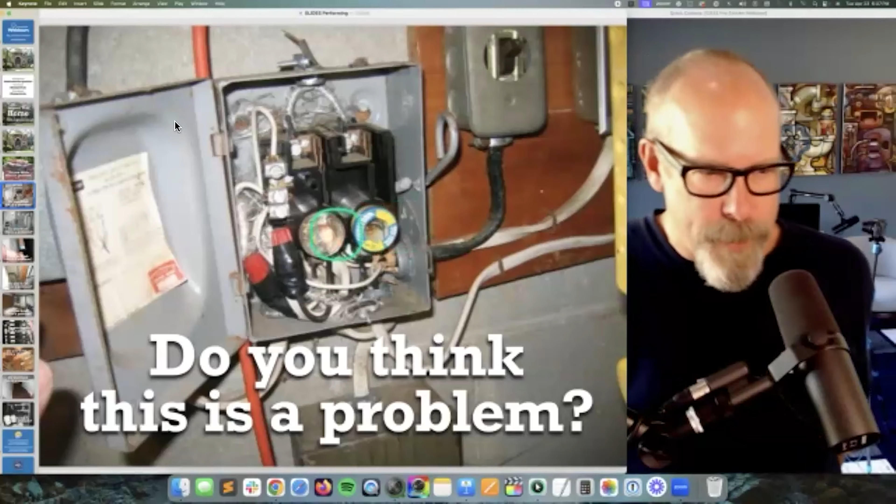Do you think this is a problem? This is an old fuse panel in this home. These connections are okay, but what is going on up here? There's some kind of damaged wire. I'm not sure about the connection. There's a lot of stuff going on in here. And the fuses, this one's overrated. You can't have a really big fuse or breaker on a small gauge wire.

Do you think this is a problem? They don't make these anymore. I like this picture because they just don't make this furnace anymore. This is a natural draft, gas-fired, forced air furnace. And we've got a couple problems here.

How about this? This is the end of a pipe. Looks like a drain pipe of some kind, maybe a discharge pipe, and it's dripping. It's copper, obviously. A dripping pipe doesn't necessarily mean a defect, but this one is. This is a defect, and I'll tell you why, because of the type of discharge pipe and what it's connected to. Here's another discharge pipe. This is discharging from a clothes washer into this pipe, and that's a defect. Can't have that.

Do you think this is a problem? This is all from this home. So we're going to inspect this home and go over these problems. There's a couple problems in there. We already went over the knob and tube wiring defect. And this is a problem at the stairs to the attic space on the 3rd floor. And this is a problem as well. So those are some of the problems that we're going to find during this home inspection.

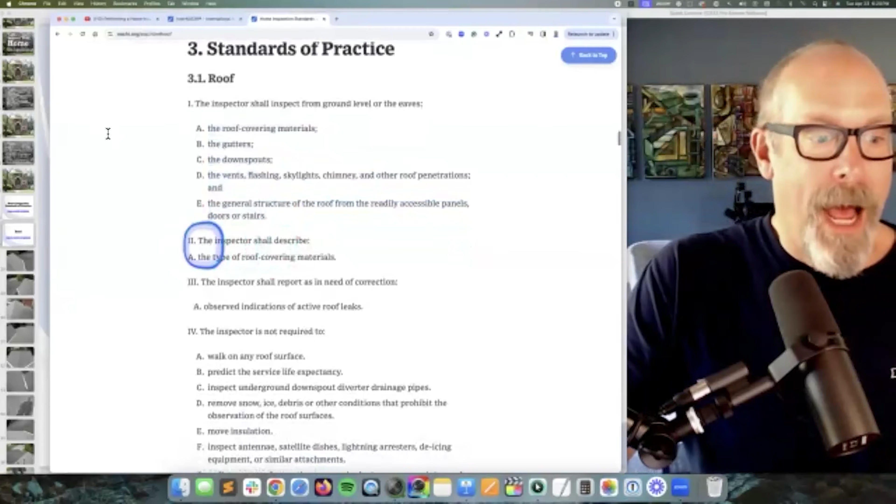What else am I supposed to do? I have to describe the type of roof covering materials. Okay, what else? I have to report as in need of correction, most importantly, active roof leaks - observed indications of active roof leaks.

So let's go back. Here's the roof. Remember, I get there early and start on the roof. I'm up on the roof. Remember, you're not required to walk upon the roof, but I do - it was part of my brand, the thing that distinguishes me from other home inspectors. Before I was a home inspector, I was a home builder, so getting up on the roof with a ladder was very comfortable for me. If you're not comfortable, fly a drone - you can get certified through InterNACHI.

So getting up on the roof was part of my brand, and that was part of my marketing as well. Your brand is the answer to the question: why should I hire you instead of any other inspector?

Because we're basically all doing the same thing. We're inspecting homes according to the same standards of practice. So what makes us different from all the rest? Well, it's the other stuff. It's marketing. And that's where InterNACHI can help you. It isn't just enough to learn how to inspect a roof like this.

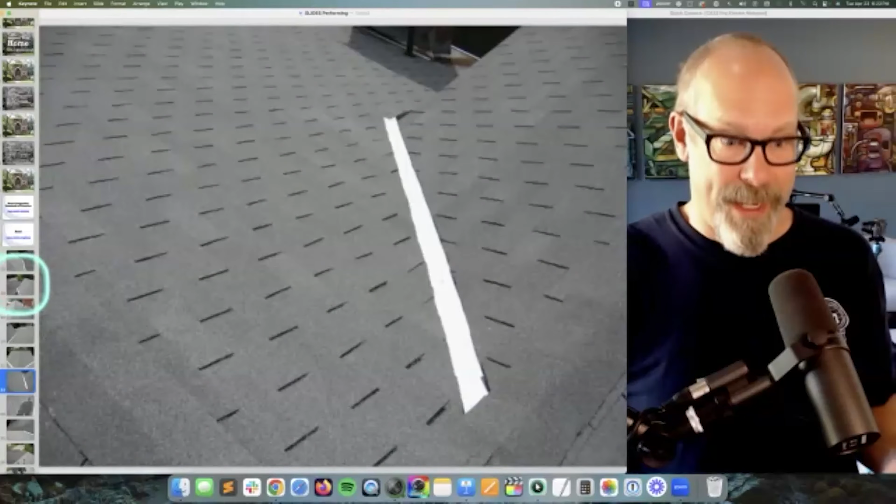To be successful in the home inspection service industry, and to run a successful home inspection company, you have to have business and marketing resources. And all of them through InterNACHI are free. You can join a group and have conversations about business, operations, marketing, services and strategies. InterNACHI does that through an accredited college, all for free for our members. That's why InterNACHI inspectors are so successful.

I love this shot. This is a marketing, this is a money shot, right? This describes with a thousand words. A picture's worth a thousand words. What I'm doing for my clients: I'm getting up there close and I'm touching the roof. Of course, I know the condition of the roof. I'm not guessing from the grass. I am right there, on the roof, touching it, getting up close and personal. If there's a problem on the roof, I'm going to find it.

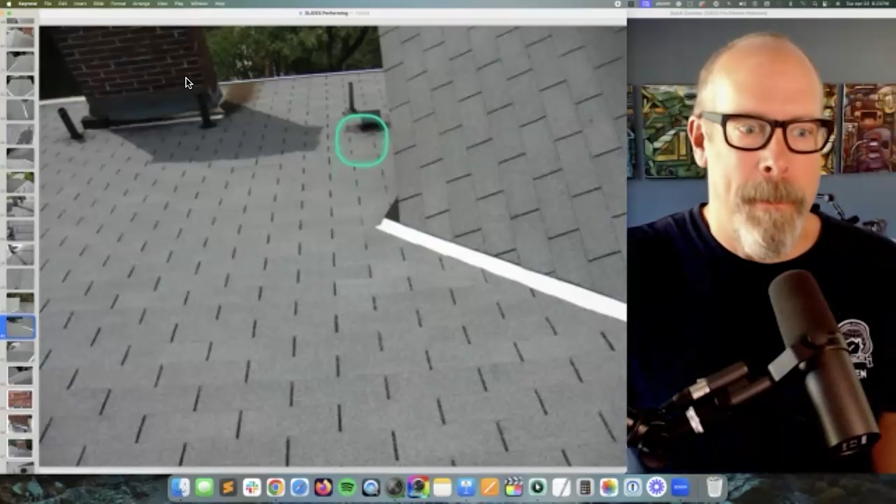And that was a distinguishing characteristic of our service. What I do is I take a ton of pictures. I probably took 40 pictures of the roof, every roof surface, looking for anything missing, cracked, or damaged, trying to guess the age if I don't know, looking at where a plane, a field, a flat surface meets another flat surface. This is flashing, like a valley flashing area, or where something penetrates, makes a hole through the roofing materials. If something comes through, first there's a hole, and then there's a pipe that comes through. Around that vent pipe, there's flashing.

And it shouldn't be heavy black tar silicone sealant. That's for driveways and temporary patching. On the roof, you want things like clean metal flashing, in between planes or around the thing that penetrated through the roof covering material. That's why you've got to get up close.

Oh, I also do videos too. The asphalt roof covering appears to be in functional condition. I don't see anything cracked, damaged, or missing. The shingles are lying flat. The granular surface looks good.

The valley flashings at the dormers appear to be functional. I'm not sure if this stack is being used. If it's being used, it needs major repair because of the masonry. The bricks are out of position.

Little video, it's a while back, low quality, right? Let's see, do I have another video here? The mortar joints are weathered and missing. And the chimney is very wide, so it needs a cricket or saddle flashing.

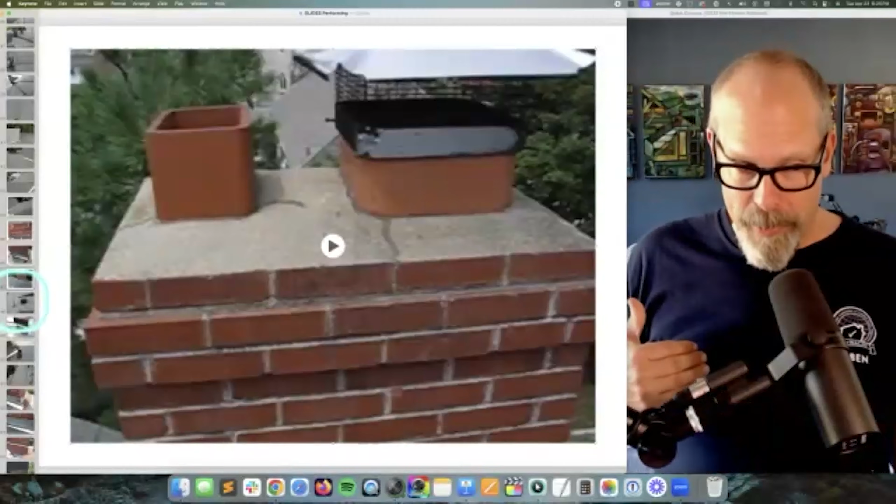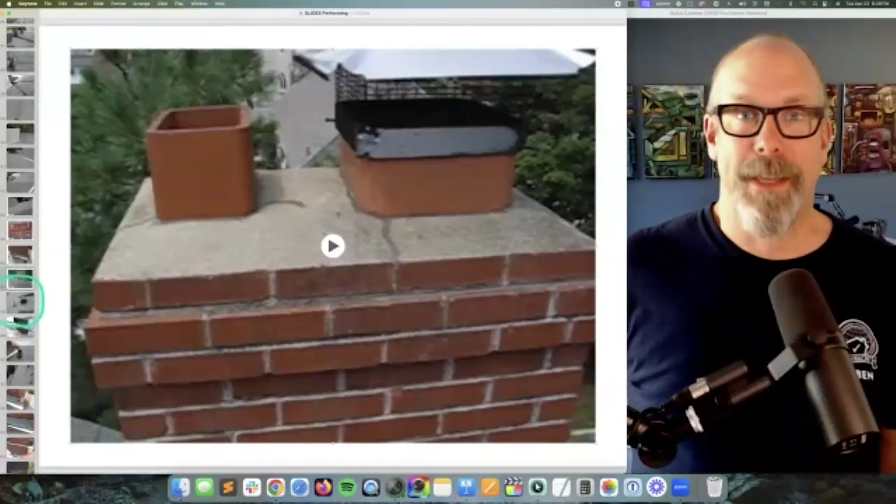So when I come down and meet my client for the first time in the driveway, at about 8 o'clock, they pull in, we shake hands, first impressions, fresh breath, business cards, and I tell them the condition of the home and the roof that I just inspected. I got down from my ladder, and I'll turn my device to them, my iPhone or iPad, tablet, and I'll play the videos.

Every time I play videos from a roof inspection for my clients who didn't have to go up on the roof with me, they're just shocked and pleasantly surprised. They're kind of like, we hired the right inspector, right?

So I don't know why you wouldn't take a lot of pictures and video. It's free, your device should be big enough to handle it, and your clients would love it. Remember, you're in the business of providing valuable information, not just doing a home inspection according to the standards of practice. You're in the business of providing value, and your clients have hired you to give them valuable information to make a smart decision. So in business, you want to overwhelm your clients with value.

Doing a video of the roof that they can't see themselves is incredibly valuable. We could just increase our fees like nuts, because every time you add value, you should get paid for it, right?

In business, if the perceived value is much greater than the cost, then it's a good decision. If the value of the information you're providing is overwhelming in comparison to the cost, if it's worth thousands of dollars, like that chimney stack that's messed up — that's a multi-thousand-dollar defect that maybe no one knows about, because from the ground, 40 feet away, it looks okay.

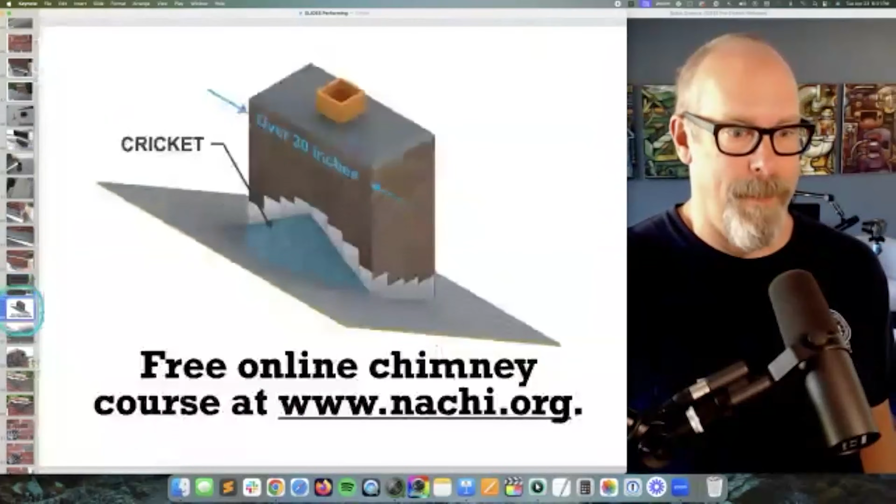That's what we got. How do you get to know all this stuff? You need to be trained. A great way to get trained is through InterNACHI, with our illustrations and pictures — we have pictures of everything.

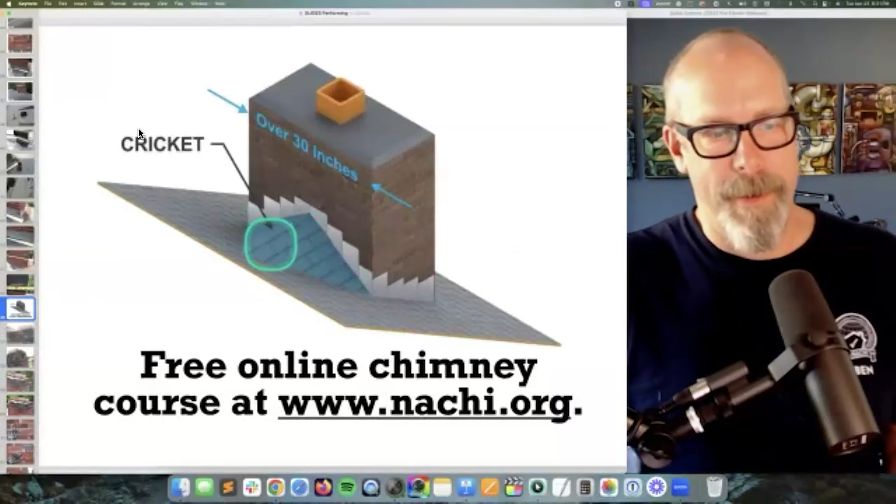This is a cricket — this is what's missing at that chimney stack, and it's because it's over 30 inches. You need something, because when you get a really big, wide chimney stack, water is going to puddle up on the uphill slope side. So you need to put in a little roof, essentially, to divert water around the very wide chimney stack.

So we have a chimney course through our online accredited college, and within the course on how to inspect fireplaces, stoves, and chimneys, there's a cricket section. If the chimney has a dimension parallel to the ridgeline greater than 30 inches and doesn't intersect the ridgeline, a chimney cricket must be provided. Flashing and counter flashing must be installed at the intersection of the cricket and the chimney. The height of the cricket depends on the slope of the roof — the lower the slope, the shorter the cricket height.

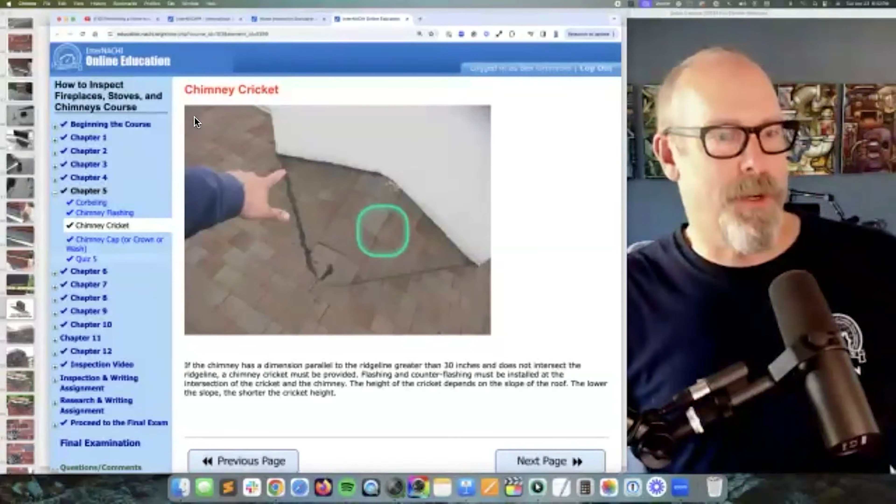That's really cool, and bam, there's a good picture. This brick here actually pushed back on the roof. It was just sitting at that angle, about to fall. If it falls, it's going to put a hole probably through the asphalt shingles.

This is a lot of fun for a home inspector, a lot of fun for me to inspect this stuff. When I come down off my ladder, I'm not frowning, I'm not getting my clients all flustered about a major problem. All I'm doing as a home inspector is telling the story, assuming that my client has found their dream home and they're going to move in no matter what I say.

So I'm going to describe the chimney condition, tell them the implications of not fixing what I observed as problems, and tell them who should fix it, like a chimney expert or mason. They're probably going to want to tear a lot down and build it back up. It's going to take a while to fix this. You can't fix it with black tar sealant. And even if the chimney is not used, they're going to abandon it, it still has to be fixed because it's falling apart, and pieces of heavy masonry are falling on the roof.

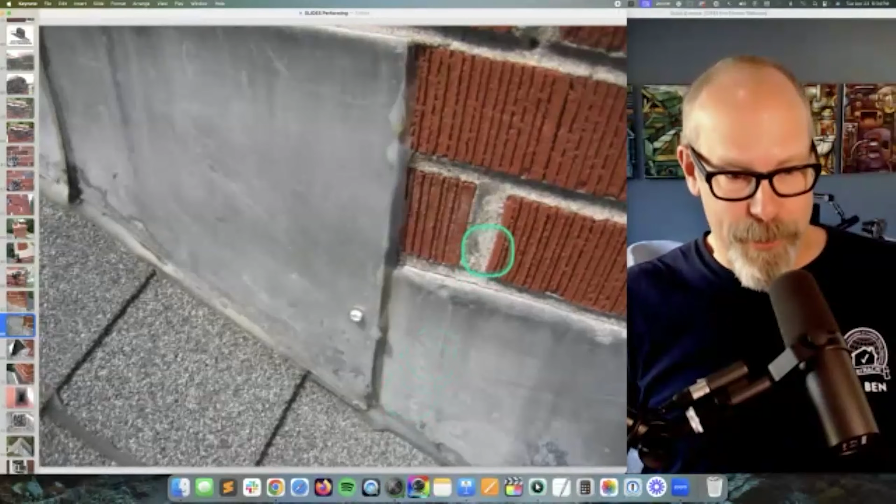The cap looks good. I like to see a little drip overhang, but that's okay. The flashing is tight - this is the proper way to install flashing. It's bent into the brick mortar joint, sealed just for added protection, but you could eliminate that if you wanted since it's masonry and metal intersecting with the asphalt shingle roof. This is really tight, this is really great. Kind of strange, though.

The counter flashing should have been on top of this one, so that's a bit odd. I think they just added more flashing to it or something. I'm not sure, but it looks great. I'm pretty happy with it.

I can take a shot with my camera down the flue. As a home inspector, I'm not required to inspect the interior flue liner, which is what this is. But if it's open and I've got my camera, I'm going to take a picture. If I observe indications of a defect in the interior flue liner with my eyes or camera, I'm going to tell my client.

Just because I'm following the standards of practice doesn't mean I have to treat it as a limitation. I'm permitted to exceed the standards of practice because they're a minimum - in fact, my clients probably expect me to exceed them. For example, the home inspection standards of practice doesn't even have the word flashlight in it. So if you use a flashlight as a home inspector, you're exceeding the standards of practice.

While I'm on the roof of the house, I take a look at the other structures on the property, and there's the garage - that garage roof looks in really good shape. There are other things I look at while coming down the ladder from the top roof, and I see we probably don't have central air conditioning - we have window units.

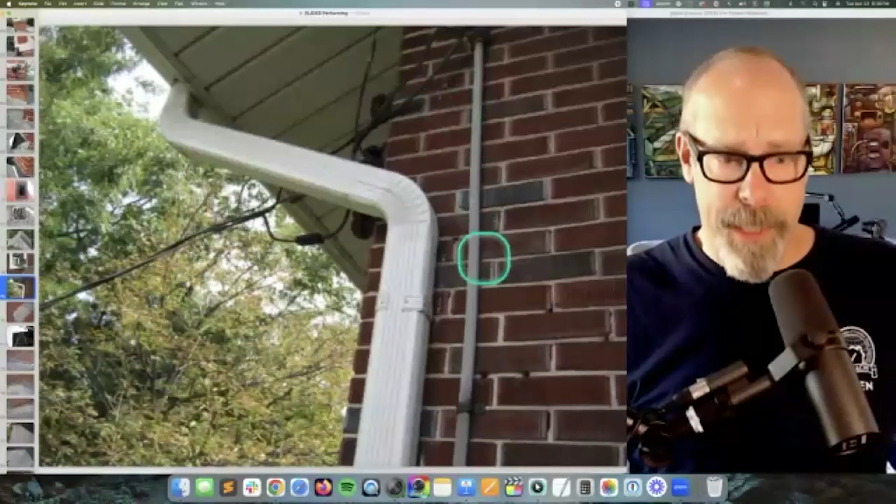There's the electrical line, overhead service electrical conductors, the drip loop, the connection point, service entrance cable. Coming down, there's the chimney stack in detail, there's my ladder, and there's another roof - a smaller roof on the side, I believe the front porch. I see flashing - anywhere the roof intersects anything else, I want to see metal flashing or good flashing made of an approved material.

So it looks good. I'm not required to inspect every window because that's impossible. I'm required to inspect a representative number of windows, especially from the outside. I can't be moving my ladder around the entire house looking at every window, but while I'm inside in the bedroom, I'll probably take a look at a representative number.

Here's a side roof, this is above the kitchen. I don't know that yet, but here's the two skylights. Wherever the roof plane or field surface intersects with the house, I want flashing. This is great metal flashing, but the gutter is filling up with debris and spilling over. Look at all this black tar, that's temporary patchwork kind of workmanship.

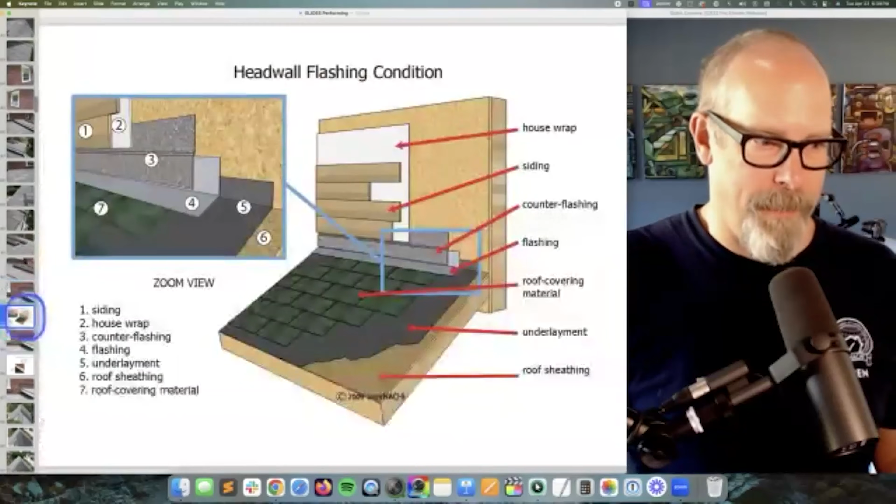And here's one here. This flashing was installed maybe into the groove of the mortar joint, but man, it was just gooped up with a lot of mortar. And then the fasteners, the masonry fasteners, it probably just threw in some masonry nails there. I'm not sure what's going on here, but it's unreliable, I would say. I know that because InterNACHI has a gallery of inspection images on how to properly install flashing where the roof meets a wall.

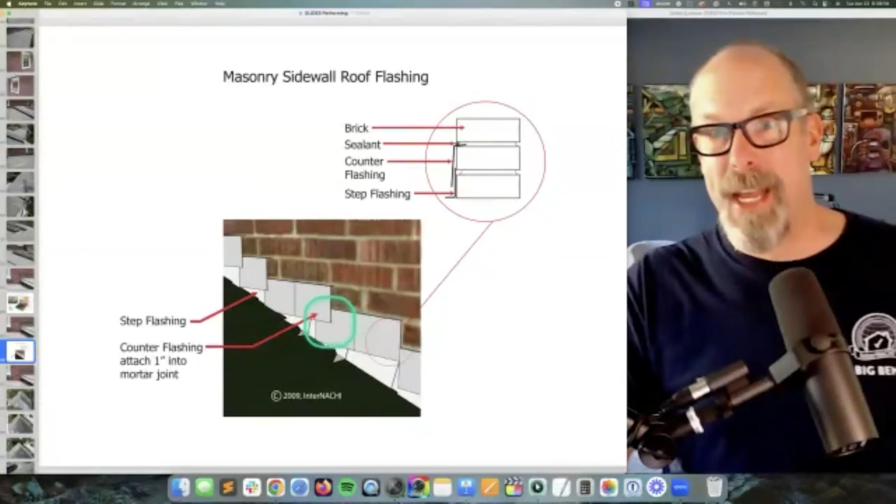And that's not it. It's more like this, like we saw around the chimney stack, remember? That was done really well. And that's not done really well. So I'm going to tell my client just to keep an eye on things. I use the word monitor that area.

Here's another one. The roof covering over the garage appears to be newer and functional. There you go, short and sweet. So the shingles on the garage look pretty good, but the gutter is in terrible shape.

Piece of plastic just bent over, falling apart, clogged, not really secured well with these plastic things. And there's a lot of adult trees with a lot of debris falling into the gutter. They're not cleaned, and it looks like the flashing and fascia board need to be maintained a little bit.

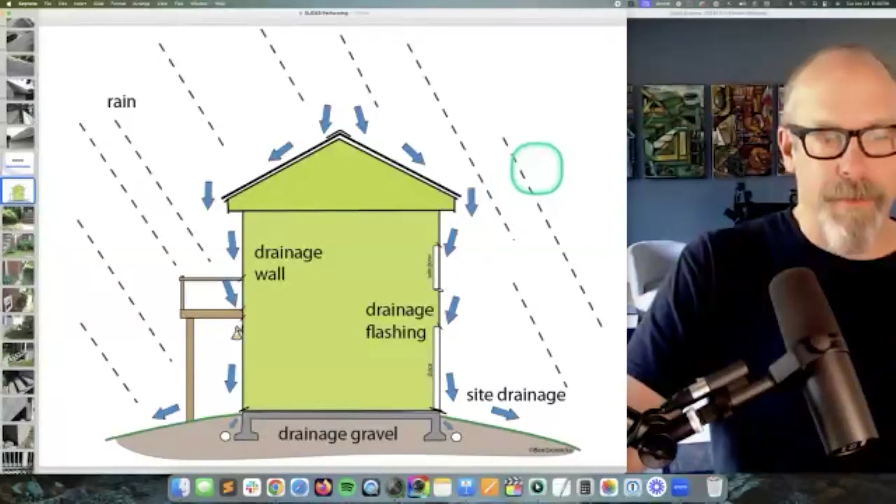So now I'm on the exterior of the home, and the first thing I think of is, remember time management? Well, how about water management? Home inspectors have to be really good at managing their time, and homeowners need to manage water. Water provides life, but man, water can destroy.

So you manage the water. You think of how rain hits the structure, how do you collect it, divert it? So here's rainwater hitting the roof, and then it falls off of the roof. Is there a flashing, a drip edge, a gutter system to collect the water, downspouts to bring the water down to the ground? But what about rainwater hitting the windows?

There should be flashing here, or at the deck that's attached to the house, or at a light fixture, some flashing areas there, or at a door, or at the bottom of the door. Is the bottom of the door above the ground? What happens to runoff? It should be sloped away. Or maybe if it goes through, is there some drainage for the foundation?

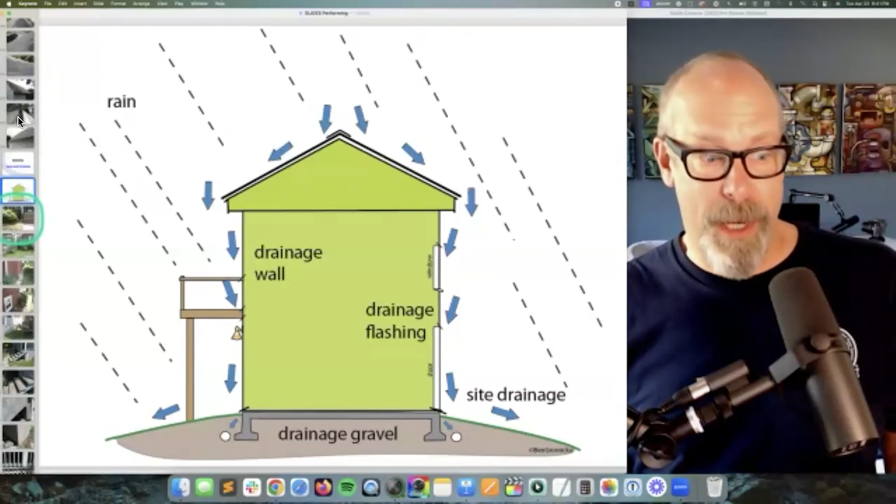So I think about rain a lot when I do the exterior. And as I walk around, I'm thinking about how the rainwater coming down this downspout is being diverted away from the house. It's not, this downspout is disconnected. Even if it was connected, it's still discharging hundreds of gallons of water right next to the house foundation and the porch foundation. So we want to divert water away from the house as much as possible.

Right here is another downspout, goes underground. I don't know where it's going, I'm not responsible for underground drainage pipes. I'm going to look for erosion around here as if the underground drainage pipe is possibly clogged. I don't see anything, but I want my client to know that we're going underground. Old home, probably a street nearby, could go to the street.

But if there are any roots, you may want to scope it or just cut it off here, let it discharge to the ground, and then slope that away, divert that water away. You want to get water away from the house foundation. If it's a hard surface, you want it slightly sloped away from the house foundation. You want to get things out of here.

This dense vegetation is just holding a lot of water and moisture up against this brick wall. Masonry, exposed masonry like this, can absorb moisture and wick it. And moisture can wick up all the way through this, into the interior and all the way up to the roof.

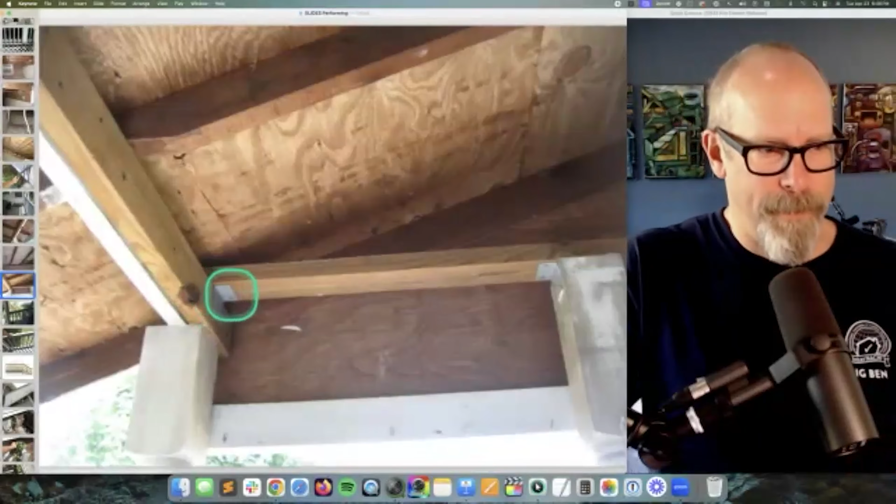There's been some repairs. I just want to have my client who's walking around with me see what I see, and then we'll put it in the report as something to monitor or maybe ask questions, because you can see some things have been replaced, and the fastening here isn't really proper. I'm not sure why they would put it there, and it's kind of missing the beam here. So I think a homeowner probably did this work.

There's a guard here, and you should know some basic measurements about guards.

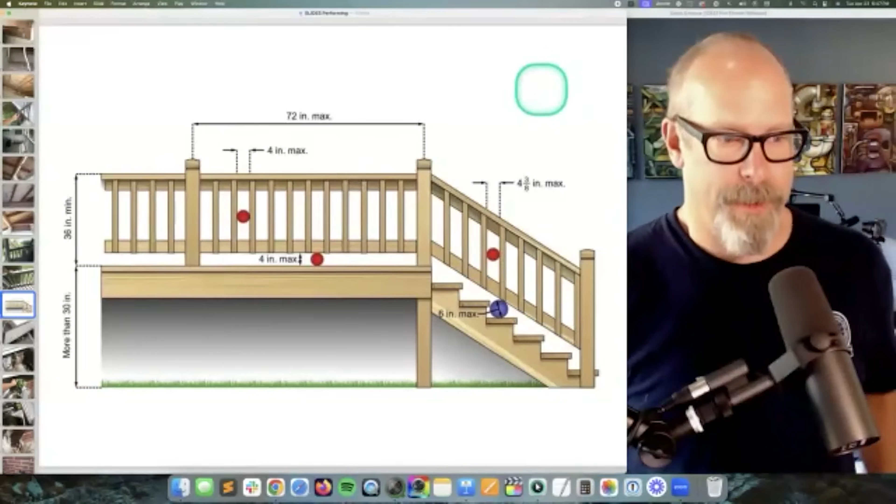And we want a railing to be a certain height, and we don't want things to fall through the guards like a small child. So this is code, actually, right? This is something within the International Residential Code or building code or local building code. This has to be a certain height. Can't have more than 4 inches of space in between the spindles, 6 inches here. The space in between the guardrail posts, minimum of 30 inches.

If you have a deck that's lower than that, you don't need a guard. If you have something that's higher than that, you need a guard. And that's all code, but again, home inspectors are not code inspectors.

But all of InterNACHI's courses are based upon building standards, best practices, inspection processes, and code. So you are essentially learning building code when you become an InterNACHI certified home inspector, because you want to know certain things. You don't need to put this in the report, and you certainly don't want to start quoting code, but you want to know if this railing, if this guard, is high enough or too low.

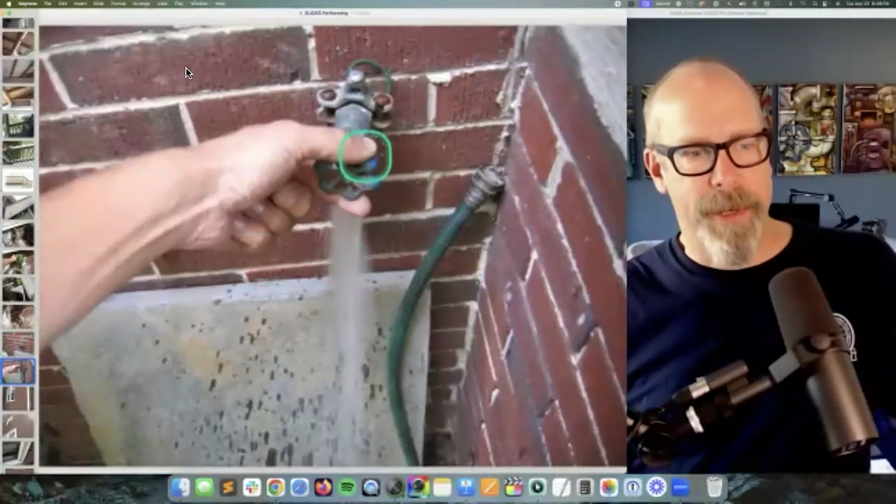The house is made out of brick masonry. It's in really great shape. The windows are wooden windows. Some of them are capped with aluminum.

That's great. This is a terrible picture of a radon mitigation system. There's a radon fan, exhaust pipe. I wasn't hired to do a radon test at this home, but I'm a home inspector, and I know that this radon system has to meet modern code in order for it to be safe and functioning well.

And we have a home inspection checklist just for radon systems. So if you're a home inspector and you come across a radon mitigation system and you want to tell your client whether you think it's in good shape or not, or it has signs that it was built long time ago according to standards back then, 15 years ago, but we've learned better now, and so we've updated the standards, and now maybe the fan orientation is all wrong, or it's not draining properly, or it's not fastened properly, or it's not exhausting high enough, or something like that.

It's not meeting modern standards. That's really good information that you could provide as a home inspector who's not there to do a radon test, but you come across a radon mitigation system.

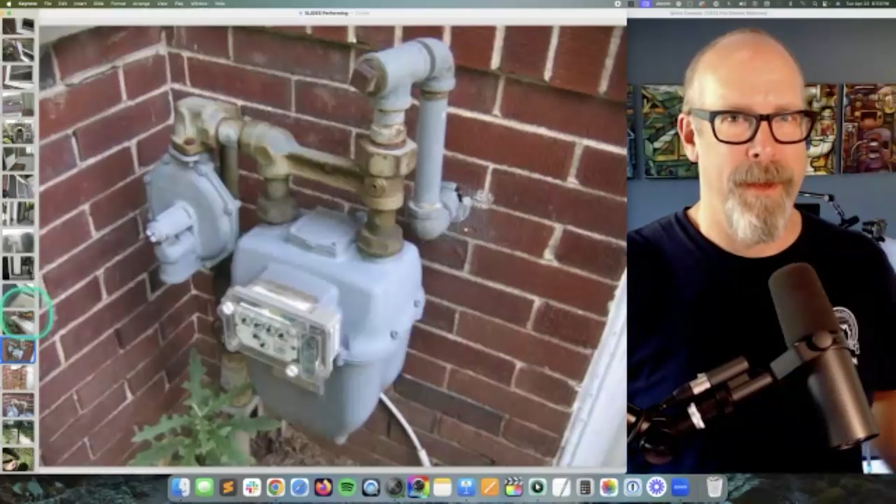There's natural gas supplied to the house. Remember that gas pipe coming out of the house? I think it's going somewhere, not sure where. Here's the gas line coming in, there's a valve, pressure regulator. I wouldn't worry about the minor rust, and then it goes in, and there's the gas shutoff valve. As a home inspector, you have to identify the location of the gas shutoff valve.

There's the front light post, but it's not hooked up and it has wires just loosely there. That's my voltage tester, just to make sure I'm not touching a live wire. That would be hazardous.

Sidewalks are all cracked and unsettled, a bit of a trip hazard here and there, even the public walk. This large tree, which is on my client's property, is probably lifting up this walk. They now have a tool that can just shave this down so it's no longer a trip hazard. They don't have to lift or tear out anything, they just shave it down. So, trip hazards on the walk.

There's a playground system there, which I disclaim. I don't inspect playground systems. Although if there's something wrong that I can just see, like it's leaning over or going to fall apart, I'll make that information available. But I'm not trained in playground equipment. No home inspector is.

There's the detached garage made out of masonry, concrete masonry units, blocks. I can see some weathered paint here and there. Remember, the roof is in good shape, but the gutters are not. It's very flat around here, probably a lot of water splashing, but it's a detached garage.

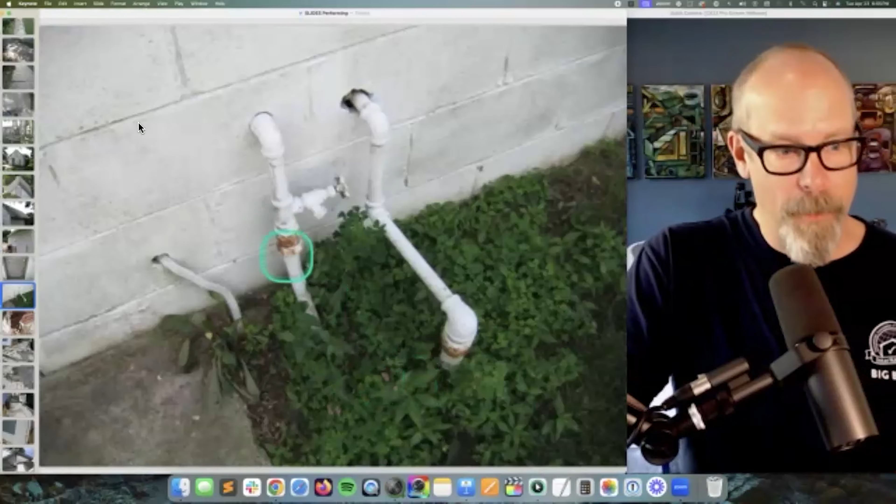Weathered door like crazy. Looks like they put in some new locks, that's nice. There's a gas pipe, a water pipe, and an electric line, so it has everything, this detached garage. But I bet it's not to code at all, and not to really good building practices or standards.

Not sure what this material is and why it's corroding. Is it two dissimilar metals, iron and copper? What is this pipe? Now it's a very large diameter pipe going into a smaller pipe. Looks like I don't think a master plumber did this. I don't even know if this is legal, just putting a pipe underground, cast iron pipe, black iron pipe, gas, going to the garage.

I think the utility company would probably want to know about that, but I'm not going to do that. I'm just going to tell my client to ask the homeowner for more information. And this wire looks okay for underground feeder wire outdoor, but maybe wrap it in a conduit to protect it. Remember that pipe? Yeah, I think it's connected to that one.

The hard surfaces are, well, the concrete is now gravel. They did a great job making concrete into gravel. A lot of cracks, and the gate doesn't work.

There's only so much you can say about delayed maintenance and poor installation. Remember, as a home inspector, there's nothing I can say that can kill a deal. My clients have spent months getting to this point where they've found their dream home in the right neighborhood, the right school district, with the right agent. They found the right bank and the right appraisal. They made an offer, it was accepted. They got an inspection agreement, contingency, and now I'm there just to tell them more information, hopefully overwhelmingly valuable information, to a person who has fallen in love with this house. There's nothing I can say really to change their mind.

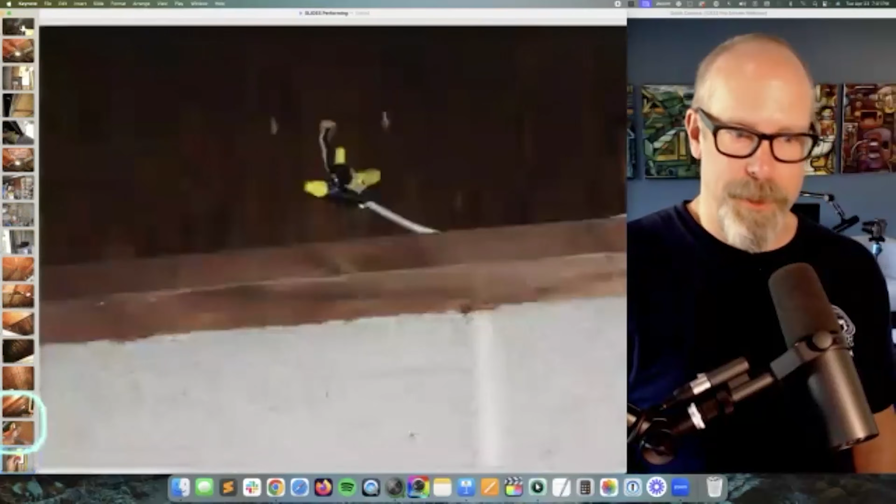A lot of inspection restrictions. I'm really looking for maybe some electrical things, right? Where's that gas line go? No idea. Where's the water line go? No idea, hidden somewhere. There's a loose electrical box there. The structure looks good. There's no GFCI protection - no GFCI protection. There's a missing box here. There's just a bunch of live wires hanging out.

And we've got this problem - fuses. Fuses are antiquated, it should be replaced. This should be replaced by a master electrician - should replace this with a breaker panel, sorry, a breaker sub panel. Little breakers, maybe you probably need a few circuits coming from the main panel on the inside of the house properly - grounded, bonded properly with a sub panel that's properly wired by a master electrician, not this.

Okay, you want to be safe. It has to be functioning. We want all of our homes, all of our systems and components to be functioning well and safe. And we also want our home to be healthy as well. So healthy means it's dry, doesn't have lead hazard paint, remember? Heating and cooling is next, okay?

So it's been 1 hour in the webinar, which is great. I think we're on time, we're managing our time well. We're going to heating and cooling. Let's take a look at some of the questions or the chats.

Andrew says, what do you do if the seller wants to follow you through the inspection when your client is the buyer? Okay, my client is usually the buyer, and I want my buyer with me, following me while I inspect, asking me all kinds of stuff, because as a business owner, I'm trying to manage my time. I don't want to answer questions at night, right? So I want to answer all the questions while we're here, attend to every concern and question while we're together in their home, so I can tell the story of their home to them face to face.

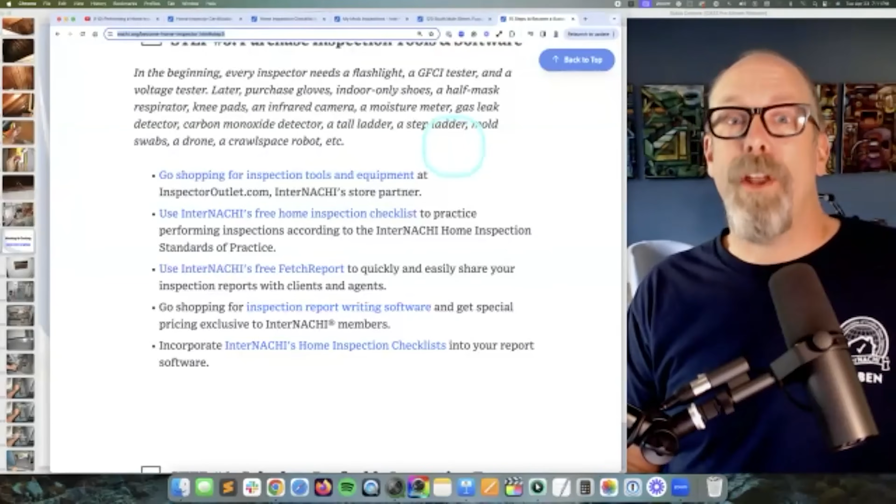I want my neighbor. I'm doing home inspections essentially in my market area, within driving distance. All my clients are neighbors. That's how I see myself because we all live near each other, same town, same zip codes. So I'm inspecting for my neighbors. Why would I do anything other than provide them with information they can trust without any appearance of impropriety? Without any hesitation, somebody can call me up and ask for their honest opinion. Can you give me your honest opinion? Yeah, because I have no bias. I'm not a contractor. I don't have any relationship or connection to anyone interested in repairing the things that are defective in my inspection report. I could care less.

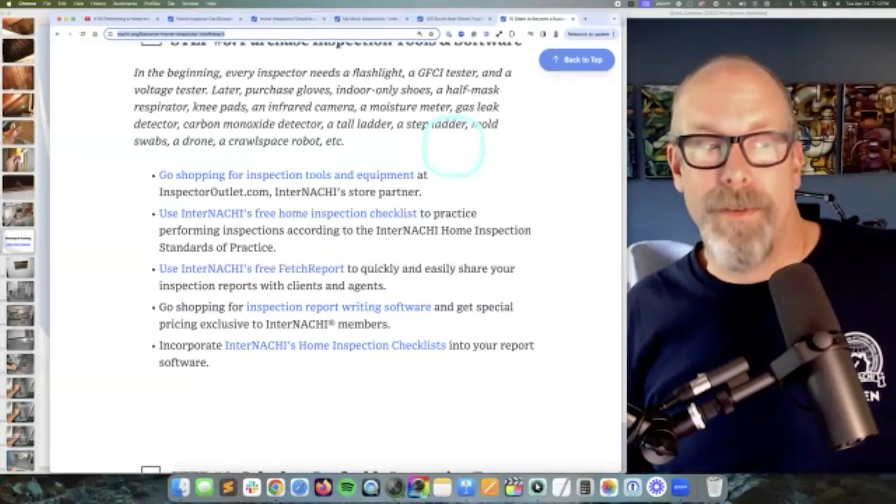Okay, that's my recommendation.

As just a licensed home inspector in Oklahoma, Nathan says, and not InterNACHI certified quite yet, that's all right. What types of inspection services can I offer now? Buyers, sellers, re-inspections. Yeah, so you want to get fully informed about what your state regulates.

And so you want to go to, there's a page within every InterNACHI dashboard. Let's see, here. So we have all the states and provinces and countries. So if you're in Pakistan right now and you want to know what's required of you to become a certified home inspector and what services you can provide before you get a license, click that button. So in Oklahoma, here it is. Here's information about how to become a certified home inspector in Oklahoma.

It looks like you have to take a 90-hour pre-licensing course approved by the Oklahoma Construction Industries Board. And InterNACHI's 90-hour pre-licensing course is online and free for InterNACHI members. So you said you're not a member yet? I would join InterNACHI and take the 90-hour online pre-licensing course, which is free for members, and get licensed. Then take our resources to take the state exam. And then licensed home inspectors are required to get insurance, and we have insurance for you. And it just goes on and on and on.

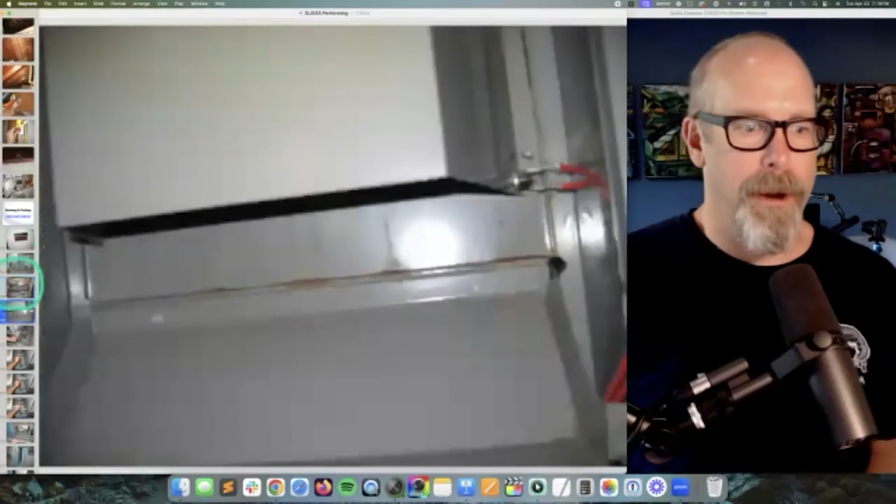So cold air returns here through an air filter, kind of an odd air filtering setup. Here's the gas line, shut-off valve. No drip leg. Pilot light. Natural draft goes in here, combustion air goes in here, and the vent pipe goes up through the chimney. There's the burners there. Natural draft shut-off switch for service.

Gas shut off. It doesn't have a sediment trap. This is a defect. Is it a code violation? I don't know, I'm a home inspector, but I am going to refer to code if I need to clarify something with a contractor. I'm not going to put code in my inspection report. What I'm going to say is something like this: if you go to the 2024 International Residential Code, IRC, put out by the International Code Council, it's fantastic because they put their code online, open to the public. You can read it yourself.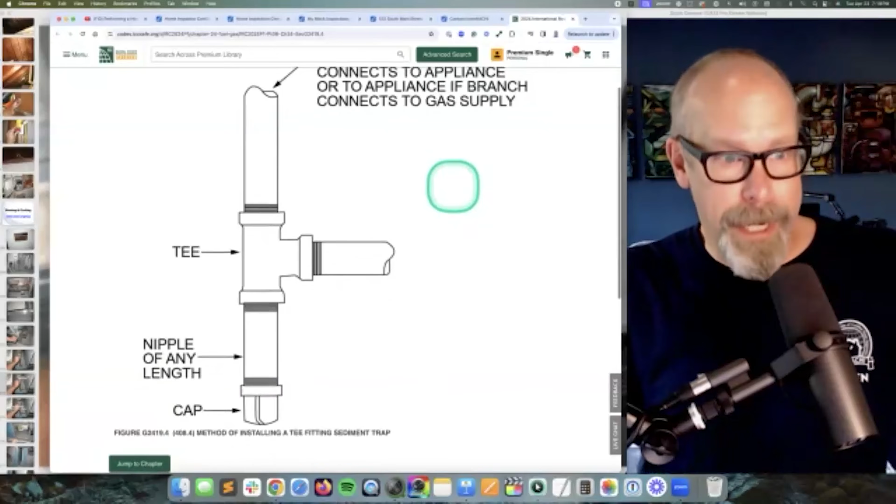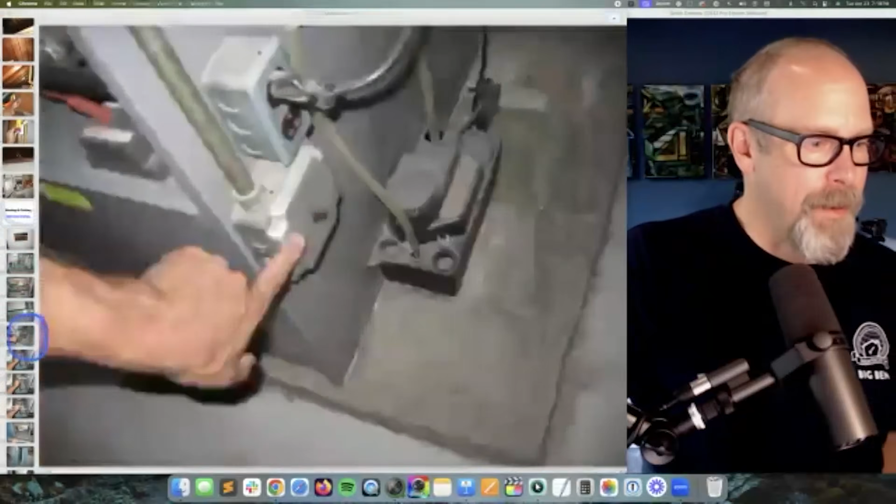Here's what a sediment trap looks like. It's supposed to come down into a T and then have a trap here to trap some sediment, that's why they call it a sediment trap. That's not what we have here, we're missing that. If you wanted to see it illustrated, you can use this illustration from the International Code Council, which doesn't have copyright, in your inspection reports.

Take the door cover off of the blower. There's the blower fan there to get to the air filter. There's two air filters, it's very strange, it filters here and it filters there. They don't make them anymore like this. Thank goodness.

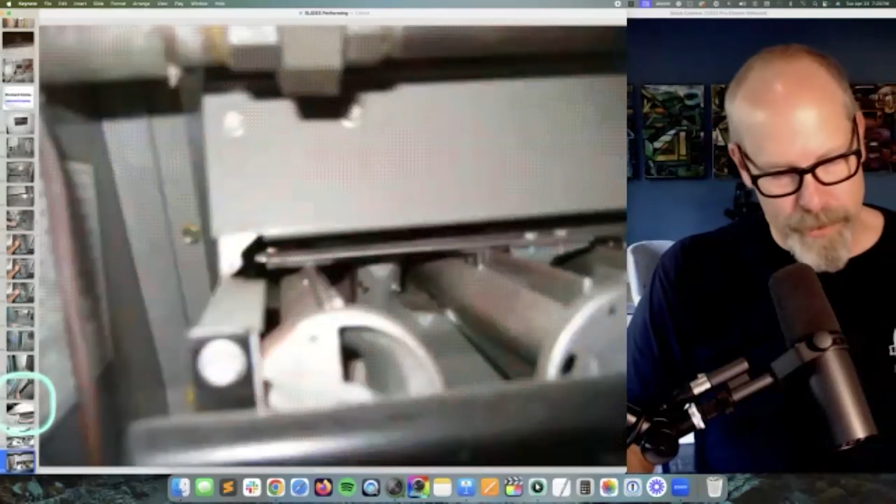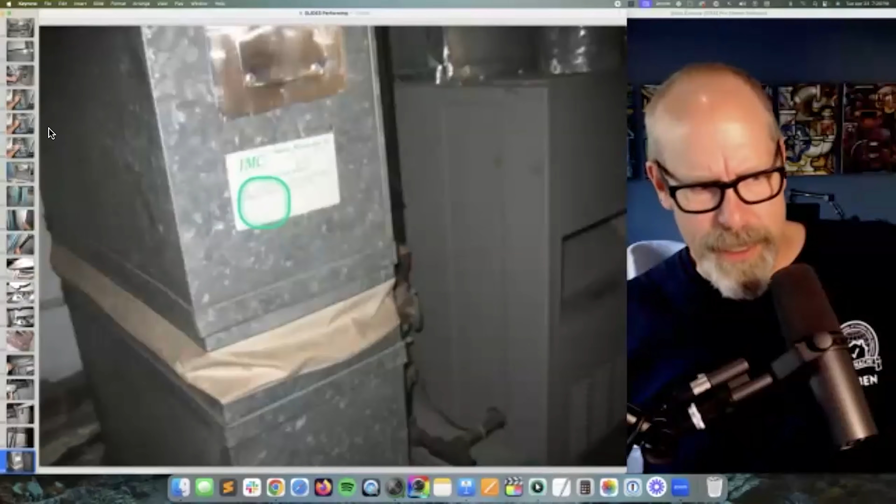Some close-up shots, they're all blurry, sorry about that. There's the vent pipe going up to the chimney stack, entering the chimney stack there. Take a picture of the model number, the manufacturing number, and the service. If the system hasn't been serviced and cleaned within the past 12 months, I put that as a recommendation.

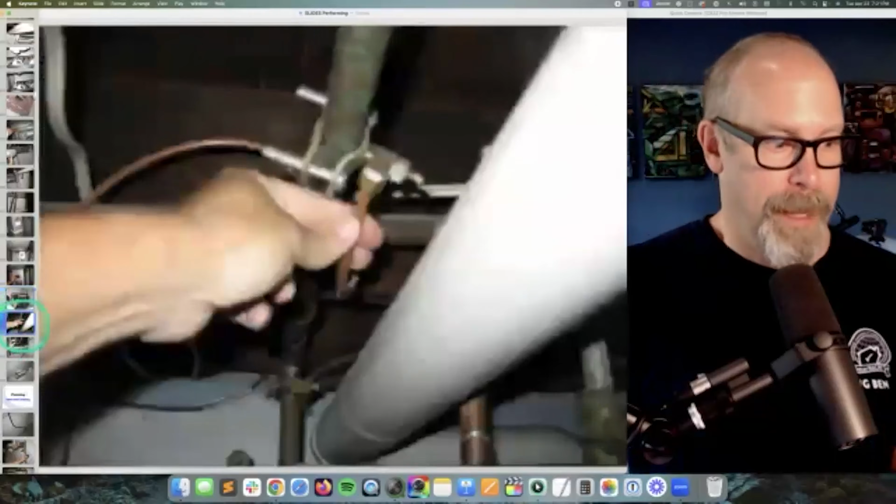There was maybe a humidifier installed here, I don't know, but there's the control, and then there's the old style humidifier here, that is an old one. Water supply line, it drains a lot of water and it goes into, in this system, a condensate pump. Drains in here and it pumps out. Hopefully it discharges outside, but we'll take a look at that.

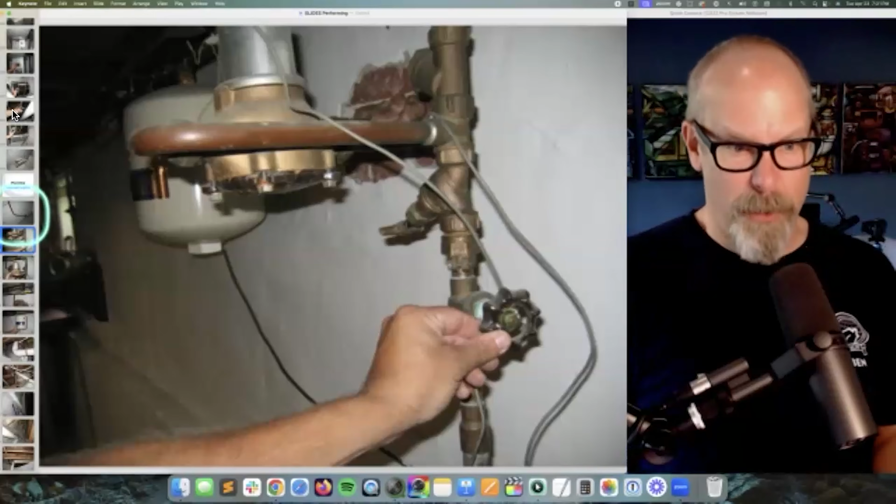Plumbing section is next in the home inspection standards of practice. There's the main water coming into the house. I think of water coming in and then drain going out through a shutoff valve. You have to identify where the shutoff valve is. I put my hand on every pipe fitting if I can, or valve, and if it's wet to the touch, then we have a problem with a water leak. There's a water meter there, and there's a shutoff valve there.

Expansion tank is installed, that's kind of nice. And then newer pipes, I remember seeing cast iron on the roof, and now this is PVC. So some work was done with the plumbing, the drain waste vent pipe, at least in the basement that I see, so that's nice, I can kind of trust that. But the other things, like the cast iron pipes and all this copper stuff that's behind the walls that I can't get to, I don't know what's going on there.

Was this where the laundry was? What is this? Why is this restricted here? Why is there a trap here? Where's the vent? I don't know what's going on here.

So some old plumbing. Here's the clothes washer discharge. It is clamped to a 1/2-inch diameter. I thought it was a supply line, but it's a drain line. That's not going to work

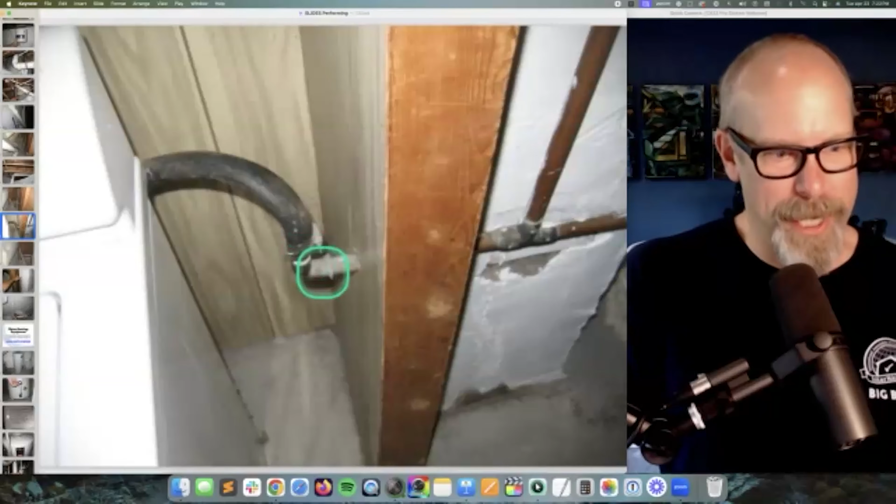for various reasons. Here's another one where that condensate pump discharges into this, duct taped and electrical taped into the drain pipe. So here it is. We've got the clothes washer discharging here and the condensate pump discharging here. And this is just all messed up. It's no good for a bunch of reasons.

Water heating equipment, or water heater, is any appliance that heats potable water and supplies it to the potable hot water distribution system of the building. I like to refer to code. In 2021, IRC chapter 28 talks all about water heating equipment. And it's really cool because there are 14 code requirements just for the TPR discharge pipe, 14 code requirements, standards, that it has to meet in order to be safe.

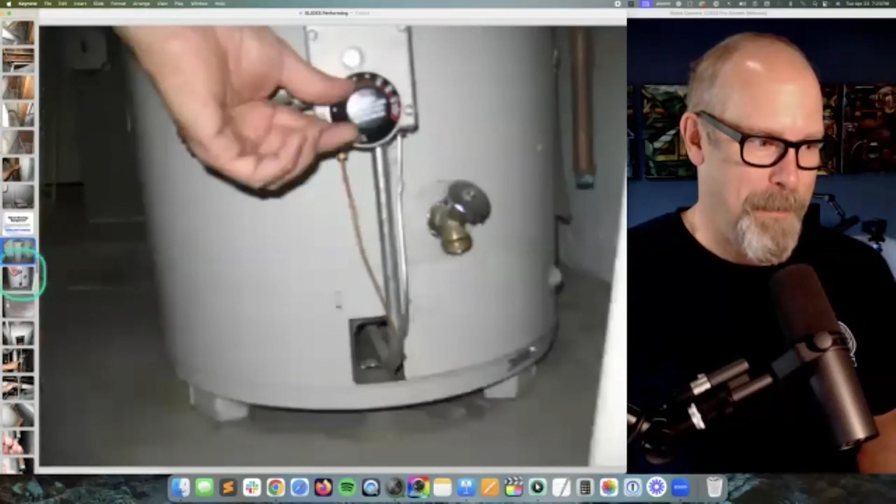14 things just for the discharge pipe. Wow, that's pretty cool on a hot water tank. So code is really helpful. Oh, and by the way, if you take the InterNACHI free online plumbing course, you learn about that.

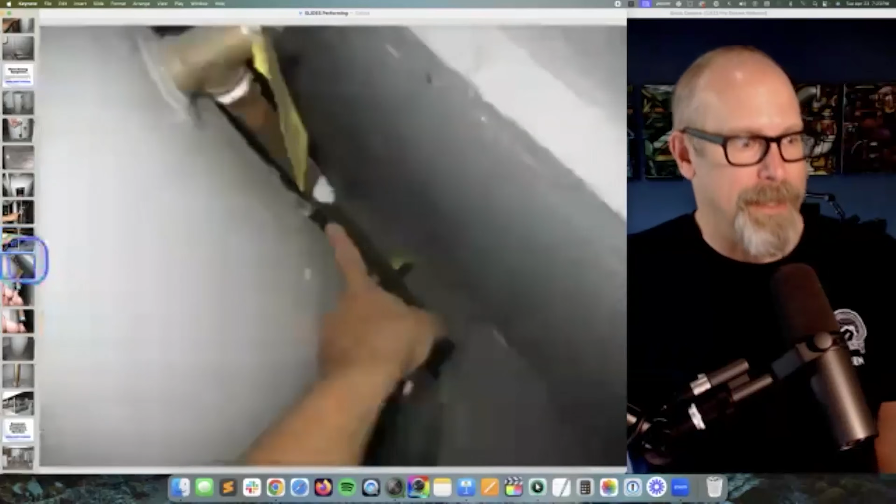There's the picture. I try to take a legible picture of the hot water tank manufacturing label. There's the cold water coming in through a shutoff valve. Gas supply shutoff valve, it's an old one, so I use my gas sniffer. There's the temperature pressure relief on the hot water tank and the discharge pipe to the floor.

That's great, but it's a dripper. So this is dripping. Not all pipes that drip are bad, but this one is. If your TPR valve, temperature pressure relief valve, is dripping water, it's relieving itself of temperature or pressure or both. And that's an indication of a problem. It's not that bad of a problem right now, but maybe it discharges tonight all over the floor, or maybe it doesn't, and it has excessive pressure built up inside the tank.

Boom. So any TPR valve that is leaking on the floor, that's a defect. So when I find this stuff, I just say here is a problem, and it has to be fixed by the seller or by you when you move in. I'm addressing my client, I'm just telling the story. I'm not telling a horror movie story, I'm telling the story of the house, and the house has some opportunities for fixing things.

I hate it when this is a flue connection pipe. I hate it when somebody puts a hole in a flue connection pipe. This is like a strap that's holding up something, I guess it's holding up this pipe, but really, when you put a hole in and you don't seal it, the seams are supposed to be sealed. This is supposed to be airtight. If this comes out, let's just say this comes out, now you've got a hole in a flue pipe.

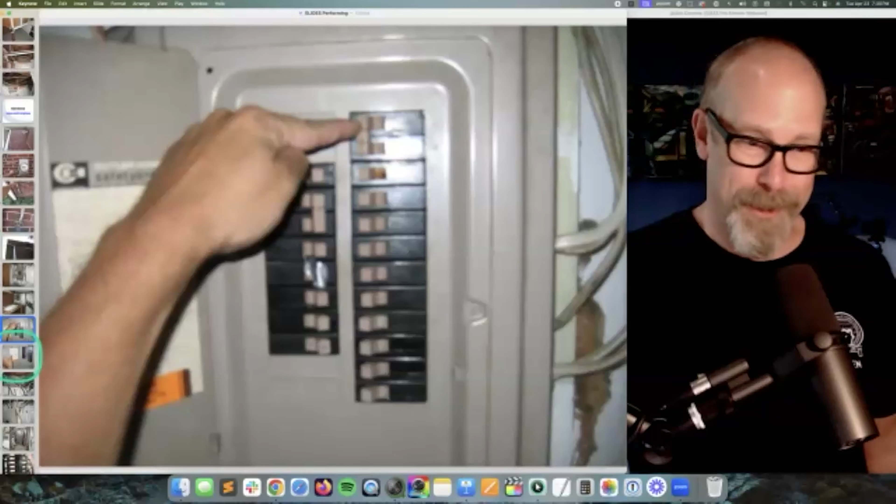All these loosely hanging electrical wires connected to junction boxes are just hazardous—you can't have live wires just hanging all over the place. So it's 100 amps, that's what the one finger means—it's really maxed out. I'm not surprised we don't have central air; it's probably not enough. If you're going to put in central air, you're going to have to get probably 150 to 200 amps to the panel, upgrade the panel—all kinds of different wiring going on here.

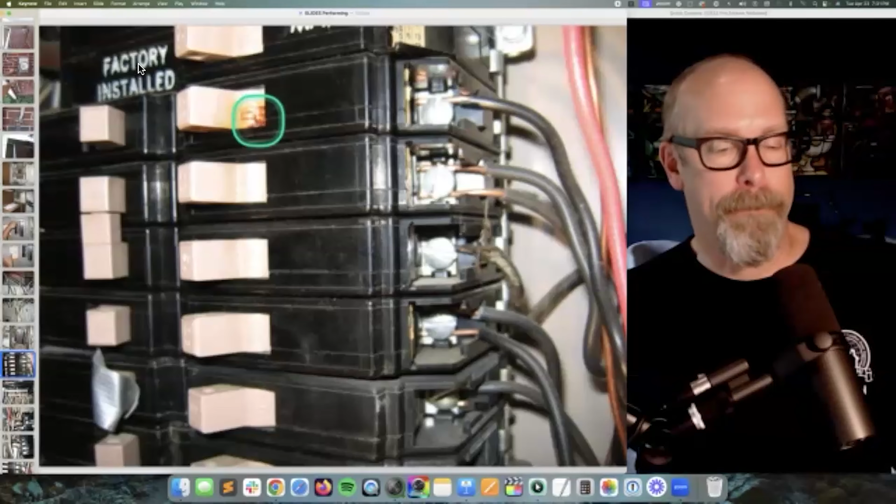Same here, nothing's labeled. You're not required to remove the dead front cover, but I like to, because I saw this—this is a scorched component of a breaker. I'm not sure what's going on, but I see that this is a 20 amp breaker on a 14 gauge wire.

Here's another 20 amp breaker on a 14 gauge wire. So we have fat breakers, big fat breakers on small gauge wires—that's overfusing, too big of a breaker. So we've got problems inside the electrical panel.

And there's another one here. I think the basement was redone, no permit—they threw in some breakers, big 20 amp breakers on 14 gauge wires all over the place. Terrible. It's out of focus, these pictures, but my report is going to be very clearly written.

Fireplace. We have that fireplace that's in very poor shape. I don't think they use it as a fireplace anymore because on the inside, the damper doesn't open and close. They have silicone on the brick on the inside, so that's not all that great. So I'm going to make sure that no one is using this fireplace until all of this has been further evaluated by a certified chimney sweep.

Attic. There's the attic space, very small attic space. Looking at the roof structure, it looks okay. But when you look around, you get to see other components like that wiring, all that spaghetti wiring. They're just thrown up there, very loosely thrown all around. Poor workmanship. There's a newer fan.

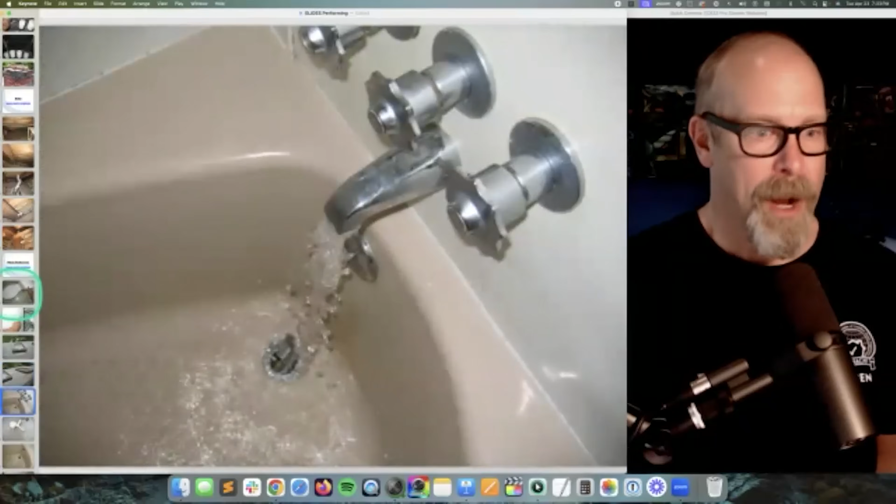Main bathroom, upstairs. Flush the toilet, got ground fault protection, run water at the sink. I could see the skylights from the main bathroom window, which is used as a vent. Run hot and cold water at the tub and the shower to see if it's functional. And then we've got a plumbing access panel on the other side of the tub - remove that to take a look for plumbing problems, issues, structural problems, water leaks.

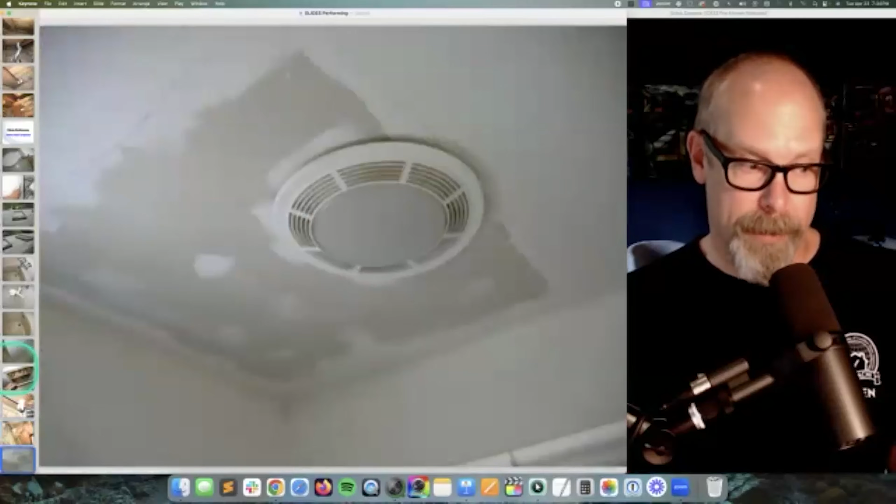Find knob and tube wiring there inside the joist bay. So it's live wiring. May not see it down in the basement because it's easy access, but within the walls and the floor structure, there's live knob and tube wiring being used. There's the bathroom fan that was installed - it's not finished, not professionally done. That's that fan there. Okay, basement full bath.

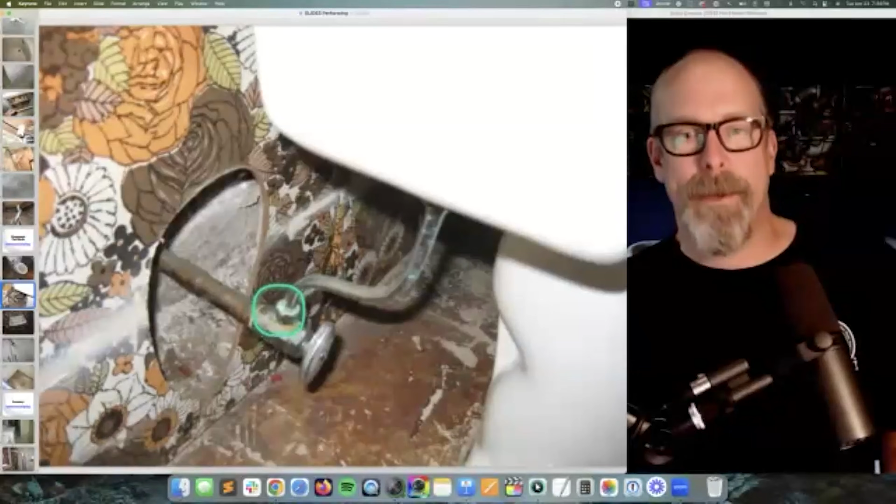Down in the basement, I don't know what's going on - I guess this was tile and they removed the tile and the glue is still there or something. There's a lot to comment on. So as I'm inspecting, I'm just adjusting what I need to say. Oh, let's turn the light on. You see me better? There we go.

So this cosmetic stuff is really just cosmetic in relation to the major problems that we're finding. That's why I love it when my client is with me because they can hear - you read and hear differently. So my report, I want them to understand what I've written before I write it, right? So I wouldn't be too concerned about things like this stuff.

I mean, this is a shower, it's functional, but man, is it nasty. It just wasn't installed well. They just put some plastic sheeting here and gooped a lot of silicone. And this is a concrete base, which is really nice - I'd save this, but I'd just remove all this stuff that's holding all this moisture and mold. Really gross. Laundry.

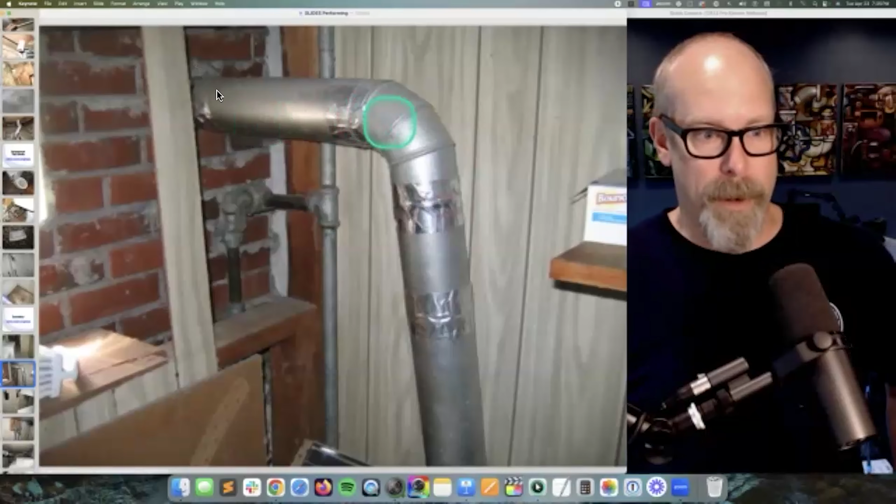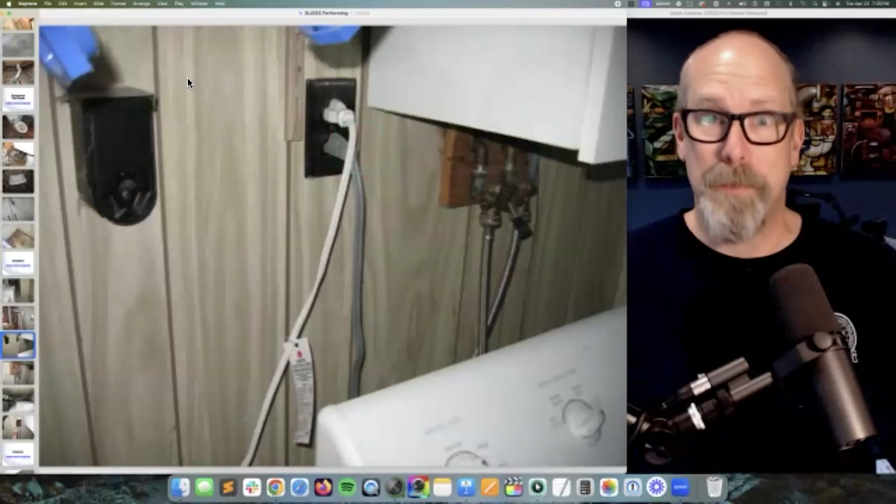Remember that vent pipe on the outside? It was pushed out because it's not installed properly. I mean, this thing can go back and forth and is twisted on the outside. You need GFCI protection now. Back then, when the house was built, it was built to code back then - everything was built to code back then, but like we need GFCI protection now.

Hot and cold water, shut off valve, that's nice. Here's the gas line to the gas dryer. It was also electric, so GFCI protection, and a couple other things.

Interior. I'm in the attic, and I'm coming down, going through the bathroom. I organized the pictures for this slideshow a little bit differently, but basically I was in the attic and I'm coming down to the kitchen. I'm trying to get to the kitchen, going through the interior, looking at a representative number of windows and doors. This is missing a window lock, kind of minor, but I'll put it in the report. I'm able to do that quickly because I'm using my software while I'm inspecting - I'm writing my report while I'm inspecting.

Broken window that needs to be fixed - that's a single pane, old window. There's heating sources in every room, including this very old floor register. It's an older house. Missing handrail - that's the defect here. You need a handrail, something that's graspable while you're walking up and down a flight of steps. So you need it here as well.

The space between the spindles of the guard is large enough for a child to fall through. That's a safety issue. When the house was built, yep, that was just fine, but children have fallen through and have hurt themselves. So we want to change that. We want our homes functioning and safe and healthy. That's why you get a home inspection.

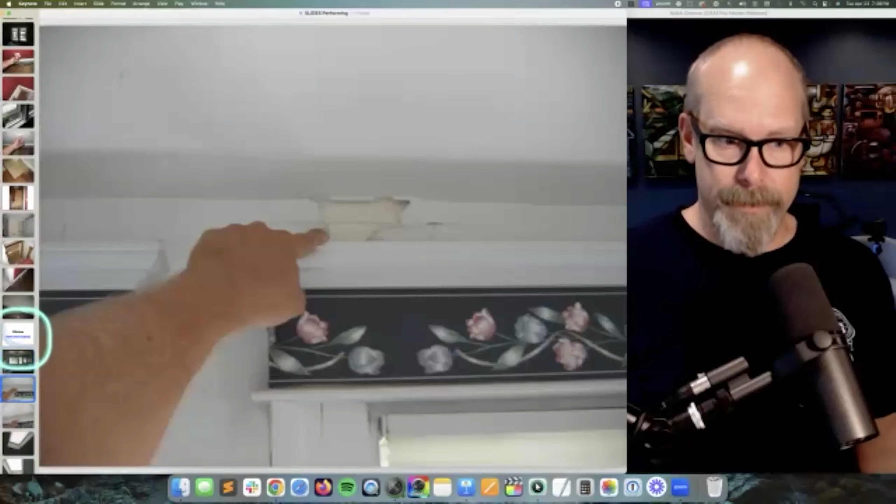Two skylights, remember the skylights? It was kind of iffy about how they looked. So right here below the skylights is where I like to look, and sure enough, there's water damage here. You can use infrared, you can use a moisture meter, but if it's dry, I'm going to say it could be an active roof leak. It's not raining today and hasn't rained for a couple days, so it's dry to the touch. Even if my moisture meter or infrared camera doesn't show any anomalies, I'm going to tell my client this might be an active roof leak, even though the skylights look new and the roof looks new. Just have to assume.

Why? Well, who would leave this in their kitchen, especially when they know a home inspection is about to come, right? And on the other skylight, there's water damage here as well. So I'll just leave that to my client to handle. I'm writing what I observe and telling my client, describing the problems that I find. This is just below the skylight, and telling them what would happen if you don't fix the potential roof leak and who should fix it, right?

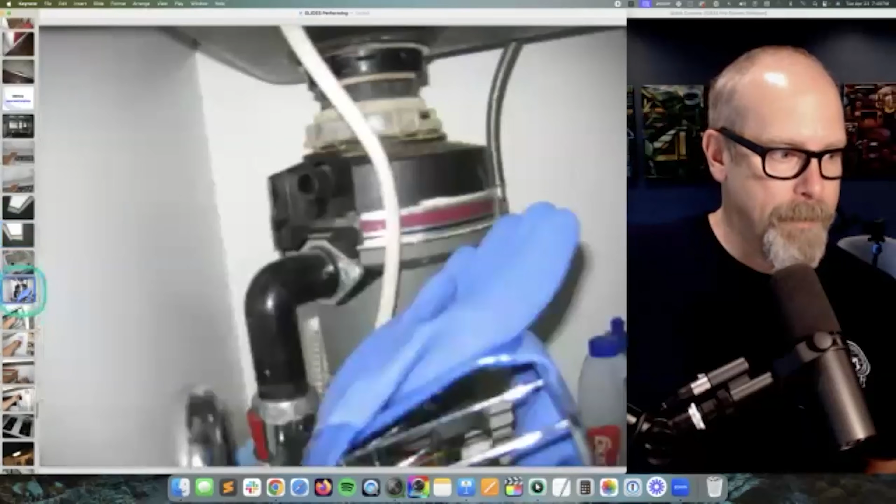Kitchen sink, garbage disposal turns on and off with the switch there. Needs GFCI protection—it is protected. All the receptacles on the counter and in the kitchen are GFCI protected. The gas stove needs an anti-tip device. The gas stove and oven don't have a vent going outside. It's nice to have a gas stove with a vent that terminates outside. All mechanical vents in a home should terminate outside, including kitchen, bathroom, and laundry. And the dishwasher—I'll run it a short cycle and see what happens.

My inspection report summary, here it is. In the summary, I tell my client don't rely on just the summary. There may be items in the full report that are not listed in the summary. If you're going to negotiate over defects discovered during the inspection, don't rely on just this summary—use the full report. But in the summary, I have correction and further evaluation recommendations, and it adds up to several thousand dollars. That's the summary, a 4-page summary.

I think the agents love it. They like a summary printed out so they can start marking things up with a pen. Even though we're in an electronic world, that printed summary report was always really valuable to my clients. Maybe it's different where you are. The full report—I tried to do it before I left the property, but it was often a challenge. I could do it at night, later in the day, in the truck between inspections, maybe during lunch. But here's the full report.

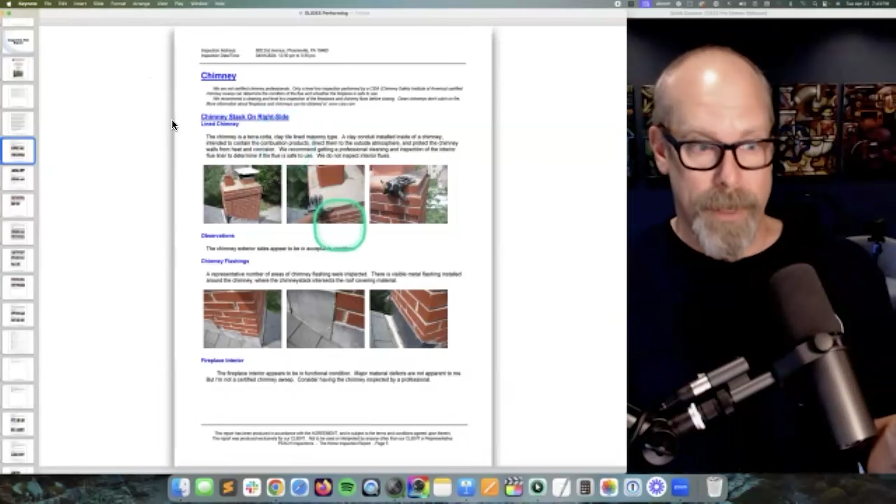The way I handle my inspection process is I think of systems and components. Components are the small parts of a system. So I inspect the system from afar, like the exterior. I look at it from afar, then move closer. I look at the roof from afar, then move closer to the components. I look at the chimney from afar, then move closer to the components. I even touch each component, and you'll see my hand in a lot of pictures where I'm touching the thing that I'm describing in the report.

So there are the pictures of that chimney stack. That was so much fun to inspect. It's very wide, has a lot of problems.

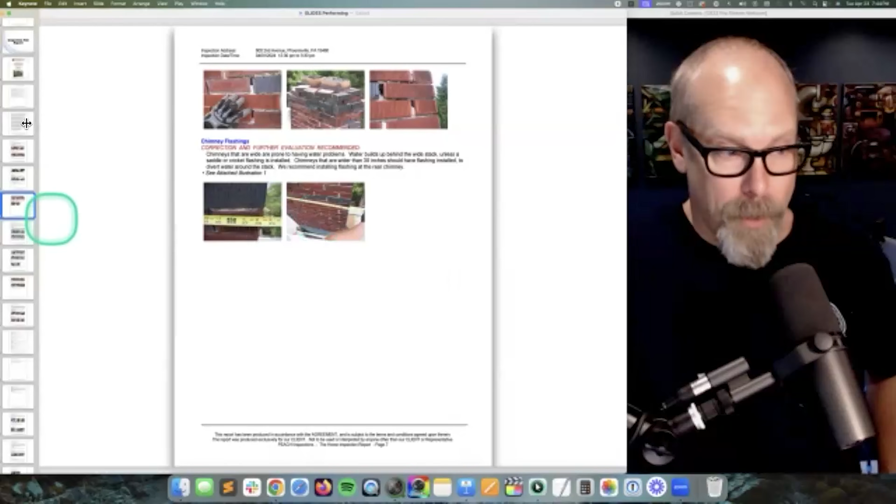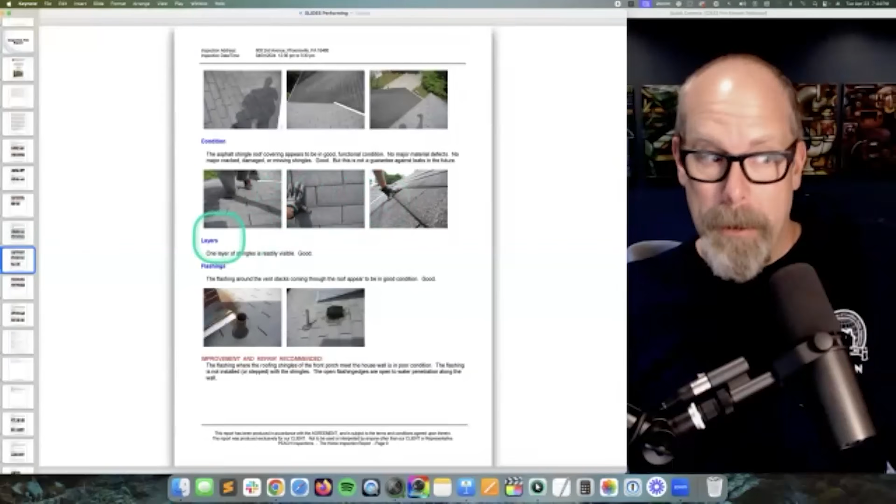There's the asphalt shingles. I put good pictures in the report, not just filled with problems, because I want to actually show this off to agents who are reading my report. The seller's agent is going to read this inspection report. I'm going to make them read it so they can see this is a pretty good inspection. The seller's going to read the report for sure, hopefully their agent too.

There's the exterior and the exterior components, right? I kind of missed the pictures on this page, I'm not sure why. And then cooling - there's no cooling.

Plumbing, there's pictures of the plumbing. We saw these pictures. There's the hot water tank, and there's the TPR valve that's dripping.

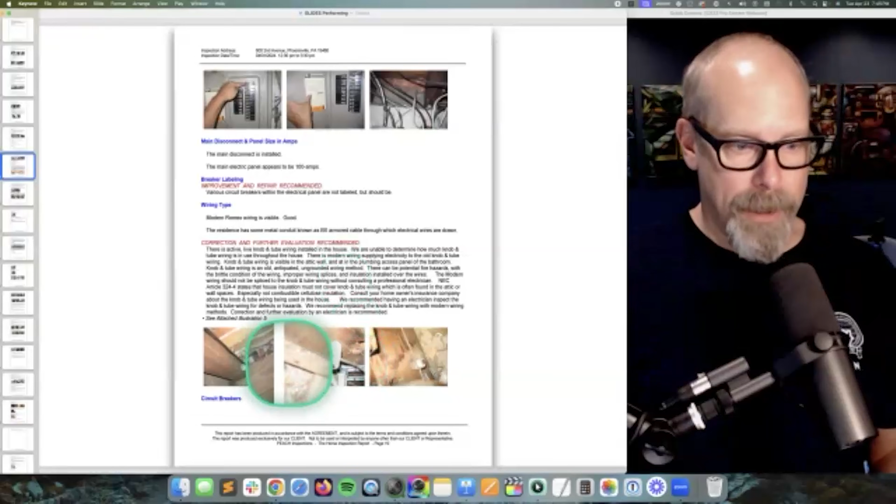There's the electric, an electric meter. What's wrong with the electric? Lots of odd wiring, labeling, and there's knob and tube, and overfusing - lots of overfusing and scorching inside the electrical panel. And there's that old fuse box in the garage.

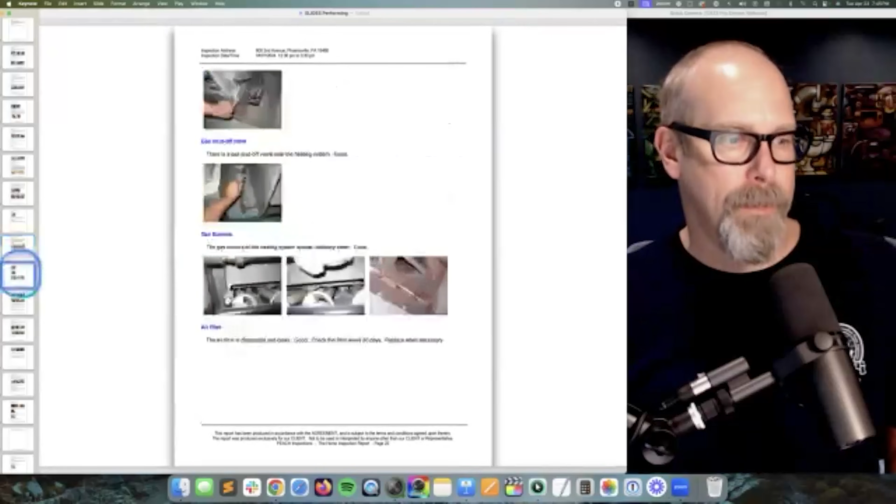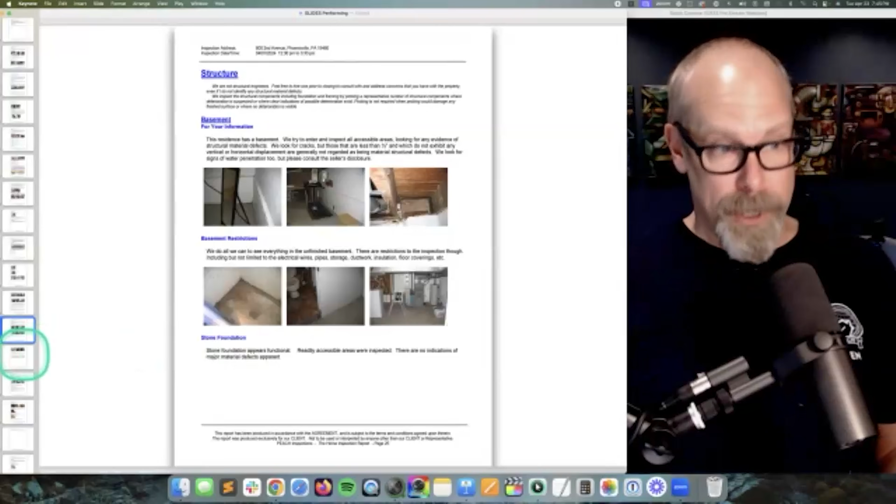Heating, very old system. Just because it's old doesn't mean it's defective, but it is old, it's not reliable. It should be cleaned and inspected every year, and it hasn't been cleaned and inspected in many years. So maybe that will trigger a conversation to replace the system, or at least budget for a new system quickly. And there's the basement.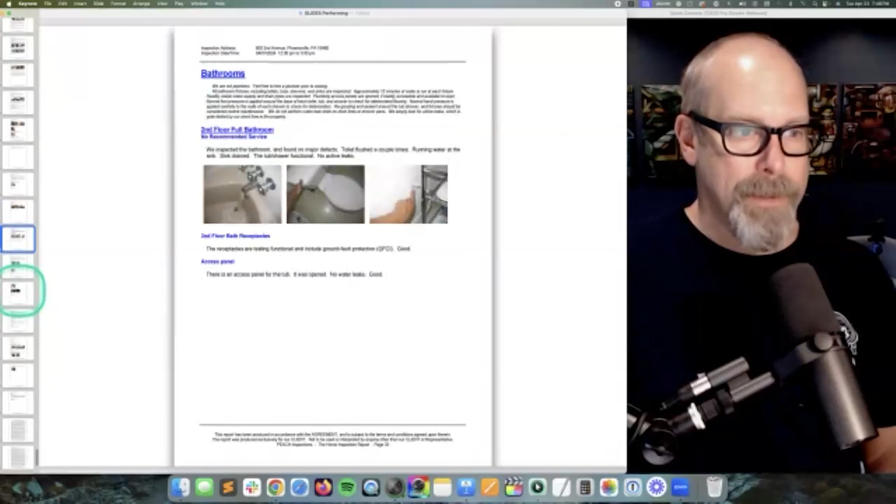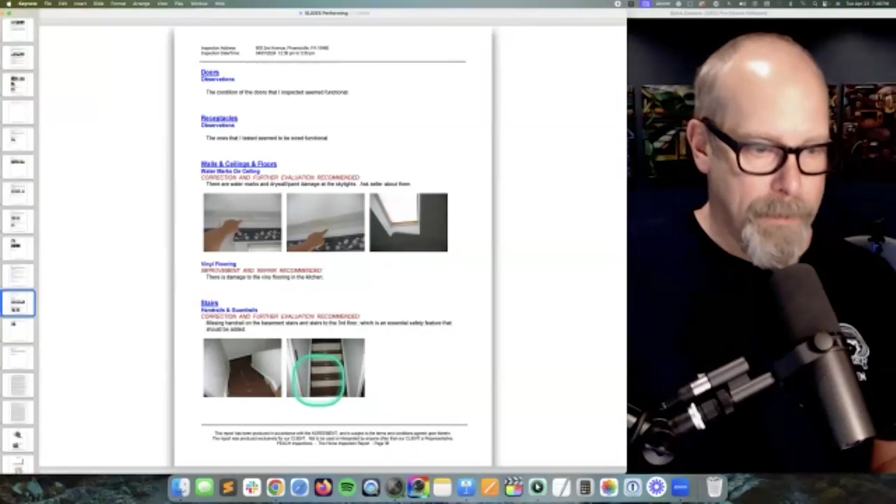There's the attic space, not sure if there's any insulation in the house. The bathrooms - some pictures of the bathrooms, and the kitchen. They got some problems there with the GFCI and the vent, and the interior has problems. There's cracked glass and watermarks on the ceiling, a missing handrail, and space between the spindles.

And there's a standards of practice summary. I want my client to understand that there's a standards of practice, but I make them agree that they have read the inspection report and the standards of practice and the code of ethics. So in the contract between me and my client, I have them agree that they have read the entire standards of practice.

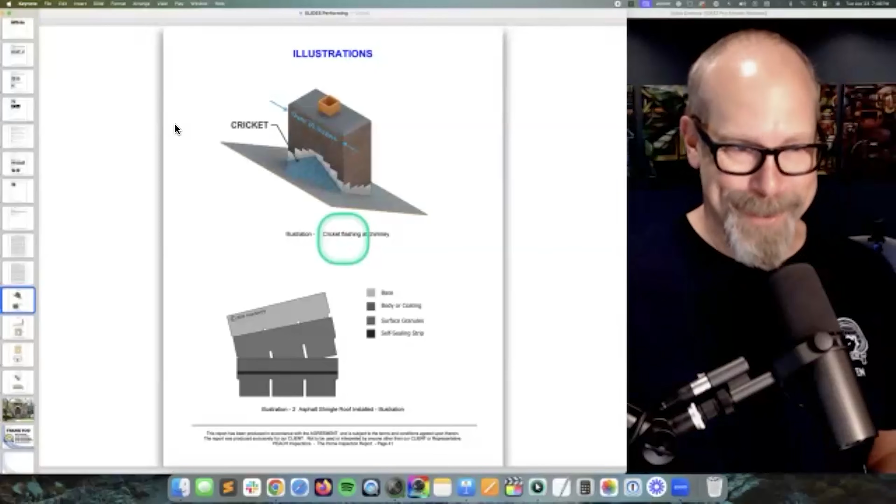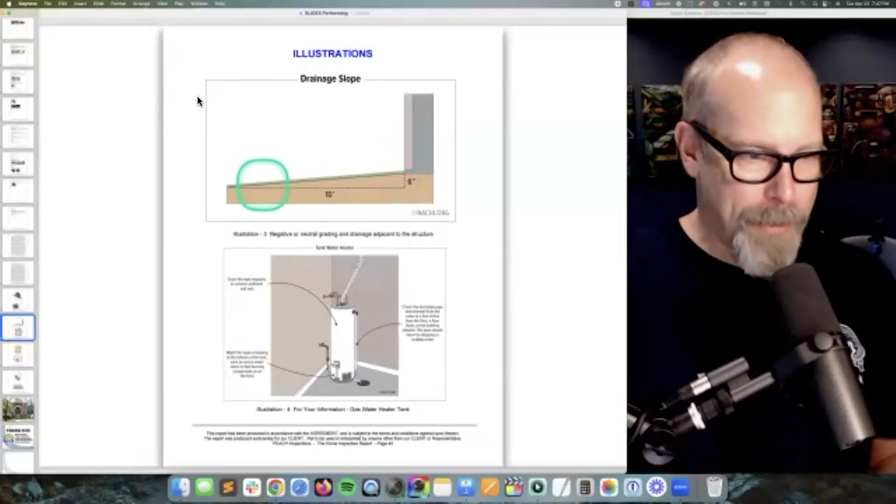Illustrations - you can download free illustrations to boost your inspection report from InterNACHI. This is really great stuff about the slope. The ground around the house should slope 6 inches in the first 10 feet. There are the components for the hot water tank.

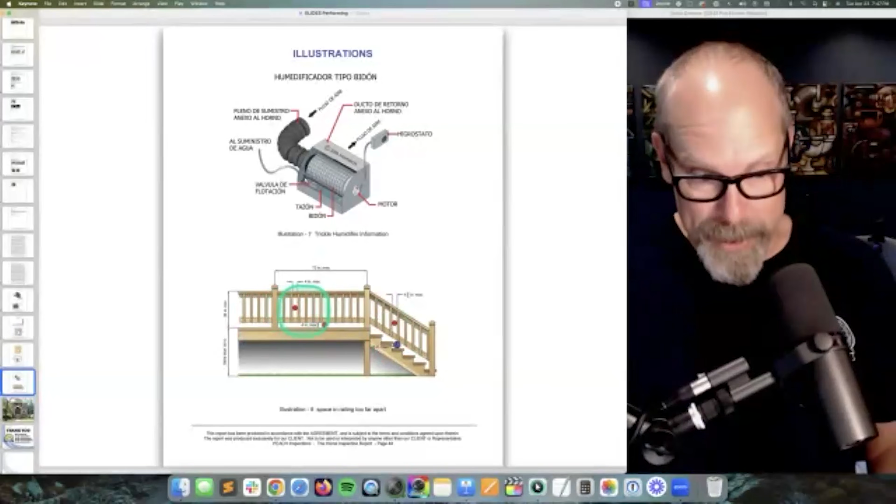Knob and tube wiring, what does that look like? A heating system, how does that work? What are we talking about? Old drum humidifier components there, and there's the space between the spindles and the railing and all that stuff. So illustrations really boost an inspection report, make it really professional looking.

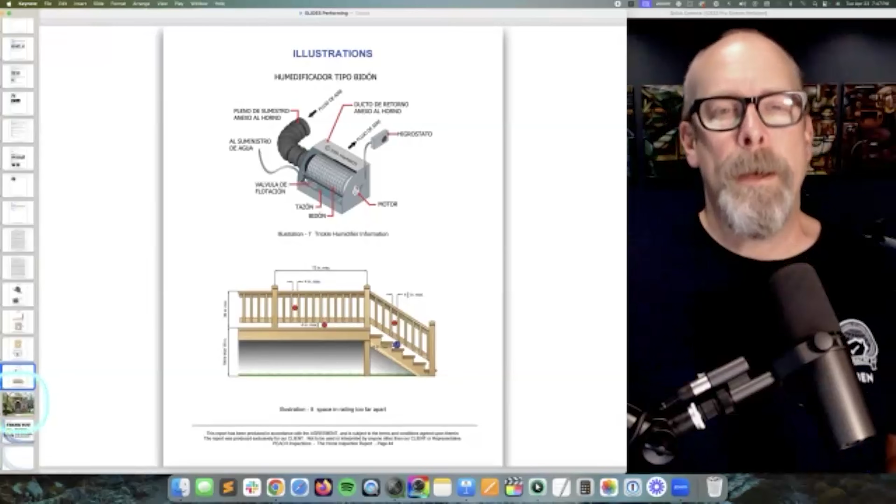And all of InterNACHI's illustrations, there are thousands of them, are available to InterNACHI members for free. And that's what we did - we inspected that house.

Let's see, what are the questions here?

How do you get written up as a defect? Man, it's tough. So how do you write things up? I would steal report narratives.

Check nachi.org slash everything. How am I gonna direct it? You're just gonna have to email me.

We have a page of sample home inspection reports, written by InterNACHI certified professional inspectors and certified master inspectors. You are permitted to download the reports and use them to improve your own, meaning you go into Jim Crumb's home inspection report, and since he writes really well, you like the way he says things. I wouldn't copy paste it directly, but I would use what Jim says about the water softener, put it in your inspection report, but in your own language. This is another resource for you - look at master inspector reports and compare them with yours.